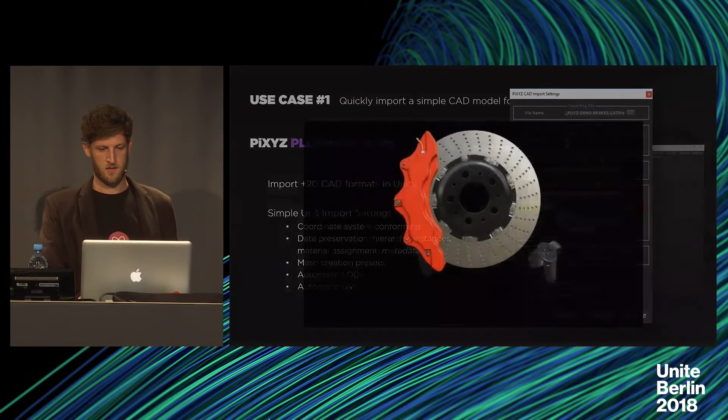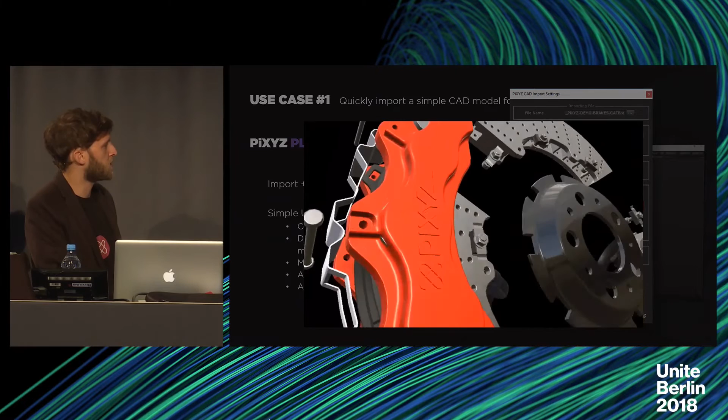After the importing phase using the plugin, you end up with a ready-to-use asset inside Unity, on top of which you get to use Unity's power to add behavior for VR use in our case. Then you finally build the final application in Unity. The result here is an Oculus VR app for CAD model review built with Unity. With some simple interactions, you can explode, grab, and do cutting planes. So for CAD model reviews, this is very interesting, easy, and fast to do with the plugin.

And there is another interesting feature: the ability to import CAD files at runtime using the plugin. So far, this is possible only on Windows, but we hope to support more platforms.

So, in conclusion, we can say that the plugin is quite the automagic tool. It's good for non-CAD specialists that need to quickly bring some CAD data inside Unity. But at some point it gets limited because you don't have the opportunity to choose your own advanced strategy for data preparation, since the plugin is just a subset of Pixyz's core. So if you want to move forward to some more advanced data preparation, you should move to Pixyz Studio.

That's use case number 2. For this use case, what you want to do is create a full car model with materials applied on it for design review inside Unity. A more complex topic, and so for this advanced interactive data prep, Studio is the rightful tool.

With Studio, you get all the import and export formats that we handle, and it comes in a very ergonomic, intuitive UI, and more importantly, with a very robust and powerful viewer, which is really necessary to display such a heavy car assembly. As I mentioned before, Studio is the original tool with all Pixyz's core algorithms, with no limitation. So for dealing with such complex data, we have to bring all the weapons we can have from Pixyz's core.

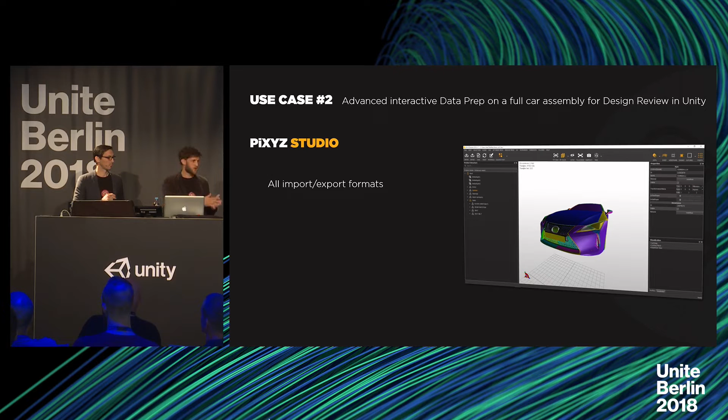So the goal here is to prepare this Lexus for Unity. I'm going to present to you the main algorithms that we have while preparing this car.

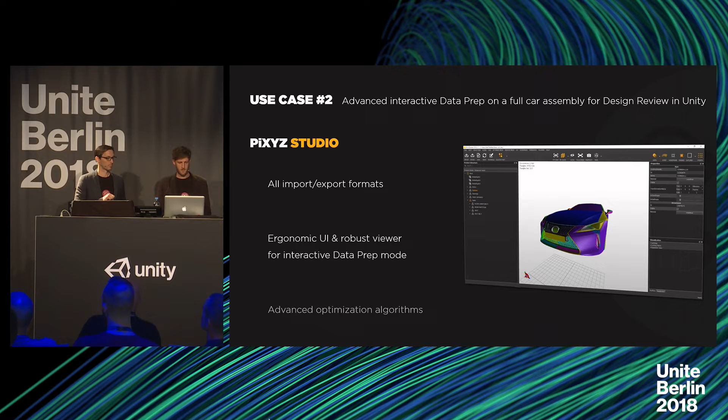So the very first step would be to import the files. For this car, it represents more than 3,000 CATIA files, which is a lot. What you get at this stage in the studio environment are not meshes - these are original CAD surfaces, mathematically defined, represented here as a gray wireframe. Once you have a complete car inside the studio environment, which is already a performance to my point of view, you can move to the actual data preparation steps.

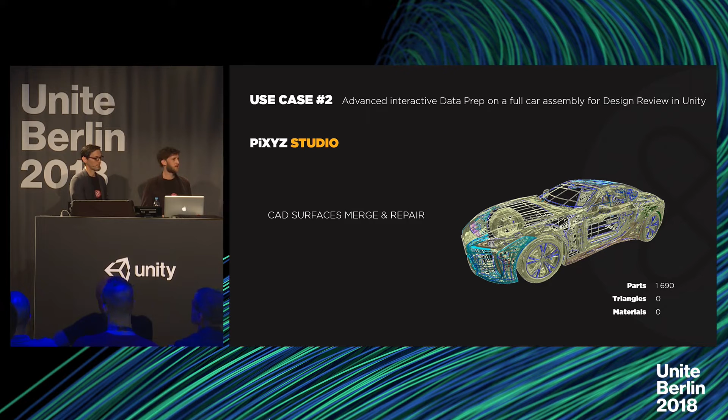Then, of course, the next move would be to create meshes using our best-in-class tessellation algorithms. For this whole car, exterior plus interior, we get 4 million triangles in total, which is quite limited still with a good visual quality.

And as we did for CAD surfaces, what we can do now is some mesh repair. What you can see as pink faces are all the faces that are misoriented - that's the way we display that in Studio. And that's very important to have well-oriented meshes when you get to Unity. So the repair phase is going to try to potentially also repair some gaps or remove some unnecessary polygons or edges, but more importantly, it's going to try to correctly orient all the faces of the model.

But sometimes it's just not enough, so you have to do some more optimization to have a fully well-oriented car. This is why we have a new script called Smart Orientation that is perfect for this kind of full car assembly, and that will automatically orient the faces. Basically, how it works is it consists of automatically placing cameras in the cavities of the car, and all the faces will be oriented by sort of looking at the scattered cameras all over the model.

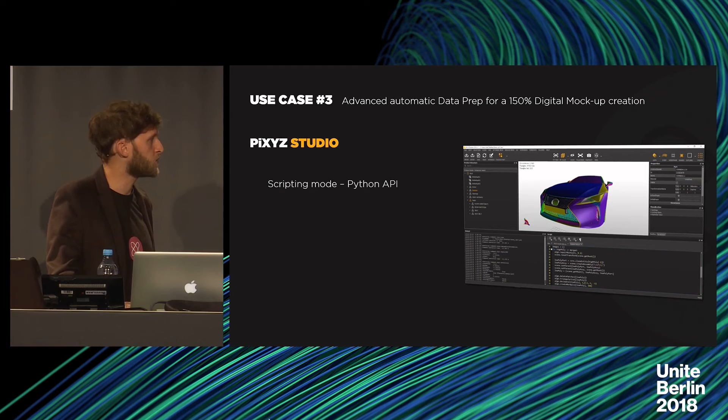So let's move on to use case number 3. Now that we covered number 2, how to automate this process and make it automatic - now that we tailored a good data prep recipe interactively in use case 2, how can we deal with the full 150% model of this Lexus and import it in Unity? Well, for that, you get to use the power of our embedded Python API, which will allow you to do some scripting, which is very, very powerful.

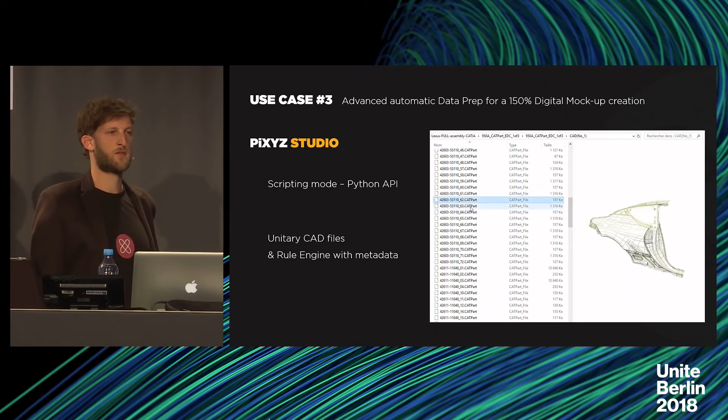Now, the Lexus model coming from Lexus PLM is completely disassembled, as I said before. It's thousands of CATIA parts, and thousands of unitary CAD files combined together make what we call the 150% model of the car, meaning it's all the existing variants of the model combined into these unitary CAD files. And now we need to build automatically a car.

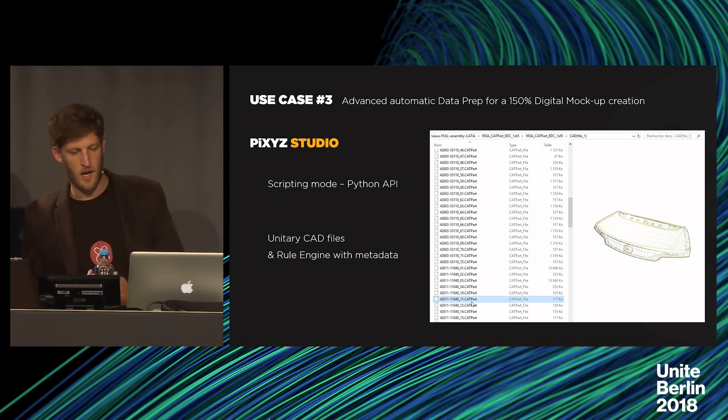How can we do that? What rule can we follow? Well, at Lexus, they have what we could call an internal solver, basically a big fat tab that says which unitary parts should be assembled for each variant, what material should be applied to this part, and which group it should be linked to. So does this part need to go to the left door, to the seat, to any part of the model?

So what we did is basically create a scenario that reads this tab, which serves as a rule engine, and loads intelligently all the parts, executing the step-by-step prep scenario that we saw in the previous use case.

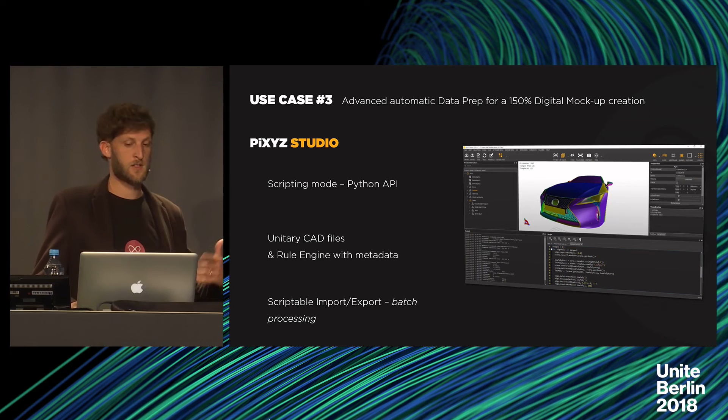And finally, you end up in Unity with a fully prepared and packed 150% car assembly. On top of that, if you want, you can create a solver to create a functional car configurator, for example, with multiple variants.

where we could have Unity applications generated on demand. The idea is to connect the product lifecycle management system of the company to PiXYZ Connect platform, which will then feed Unity experience templates with fresh and optimized CAD data. And the car configurator we've just shown you is an example of an experience that could be templatized.

in PiXYZ Studio or using the Python scripting API. At the end of the process, the user downloads the result, whether it is an optimized asset or a built application, if a Unity application template has been provided.